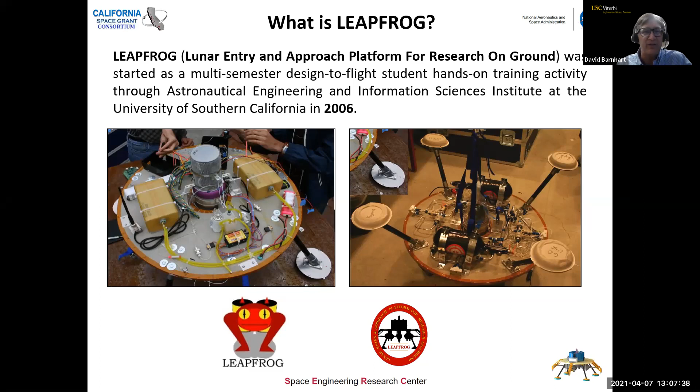Very briefly, all these charts will be up on the spreadsheet. You can look at what Leapfrog was. It was something we were lucky enough to have back in 2006 when USC put it together, meant to be similar to what the CubeSats were for Cal Poly. It was to teach students about systems engineering related to a lunar lander system, utilizing an RC jet engine to essentially take out gravity.

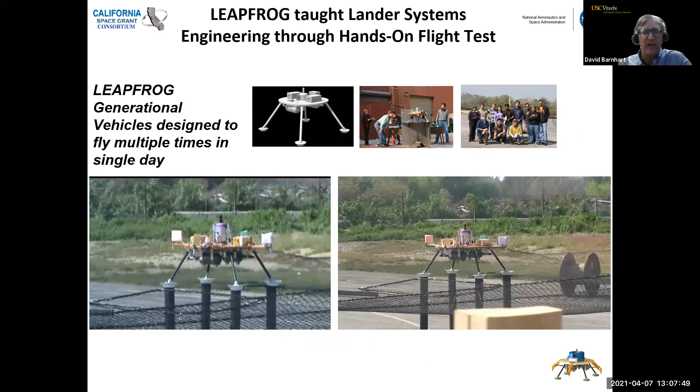We've had flights, you guys can see those on the website, I won't go through those today. We are upgrading the vehicle with a bit more safety and ease of operations capabilities.

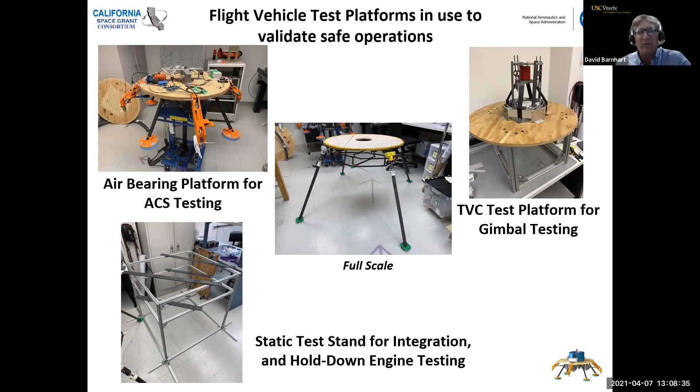Again, you will get basically what you're looking at there as a kit, without the engine. And at least that's the new activity we're doing from our project plan.

I won't go into details on this because the guys will talk about it briefly. But in essence, what we're describing today is our methodology by which we merge the hardware that will fly on the vehicle with a methodology to allow you to simulate it, and then code that would actually fly on a piece of hardware that is synonymous with both.

So that's the Pixhawk device and the PX4 controller that you actually see there, that we will actually have on the vehicles. So you're going to be running simulations that conform to that environment that eventually would port to that actual processor that would be on the vehicle.

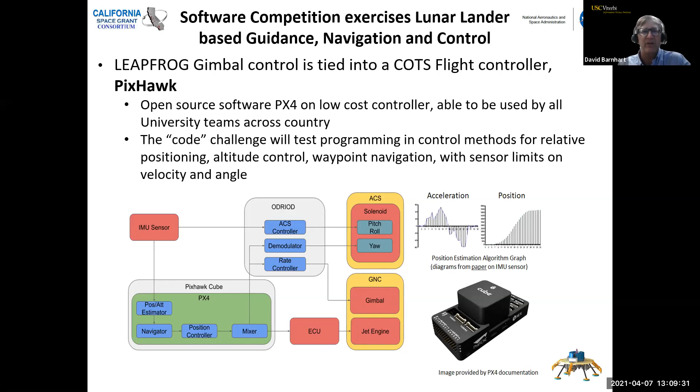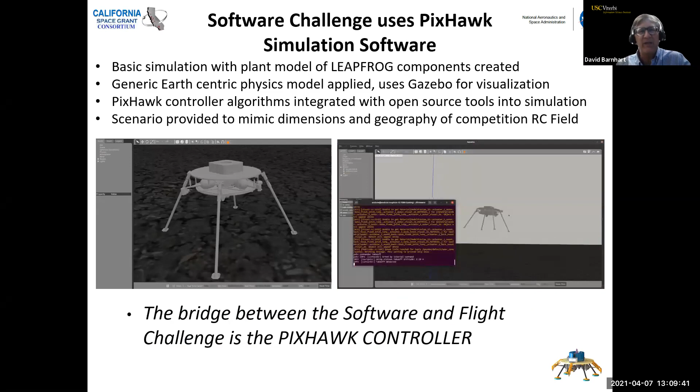So that's how we're linking what we're doing with the software and what would eventually be on the hardware that actually flies. I won't go into the details in this. You're going to see a lot more details about how the team actually came up with the simulation software and how they put it together. So I'm just teasing you here for the moment.

The particular flight challenge scenario, we will not go over today. Today again is just the tool sets that we want you to become familiar with that will be involved in the simulation challenge. The actual scenario about how it's all put together and implemented in the simulation, we will go over in seminar 2.

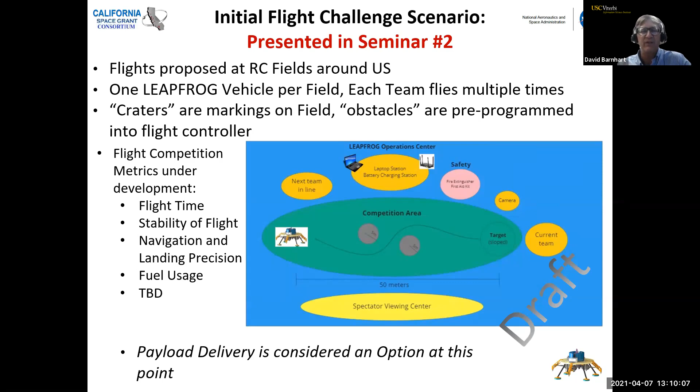So that's why we've broken these seminars up into sequences. In seminar 2 and seminar 3, we will convey the methodology by which you upload your software to our GitHub or storage location, where we then run the simulation challenge and do the scoring as we go forward. We're still working those things out, trying to get all the portals set up correctly to make sure you all can have connectivity to it, so we can have the software come together.

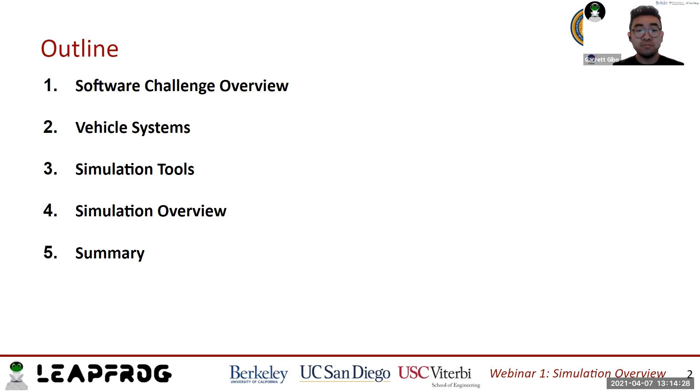So for the actual challenge of what a competition team would be trying to accomplish here, there's two main aspects. One is dynamics and controls oriented, where there are key controllers not fully implemented in the simulation, so it'd be up to the competition team to design these controllers and implement them in the correct location. The second aspect is a navigation aspect, where competition teams try to develop a navigation algorithm that optimizes time, fuel usage, and maximizes the projected score.

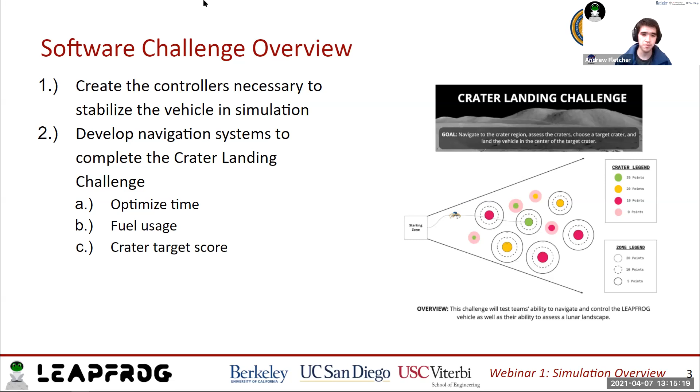This engine is on a gimbal system, controlled by two linear actuators, one for each axis, with a saturation force of 900 newtons. In addition, there are 6 cold gas thrusters on the outer edges of the vehicle. 4 of them are facing downwards, 2 on each axis - 2 correspond to roll, 2 correspond to pitch - and 2 of them are oriented sideways for yaw control.

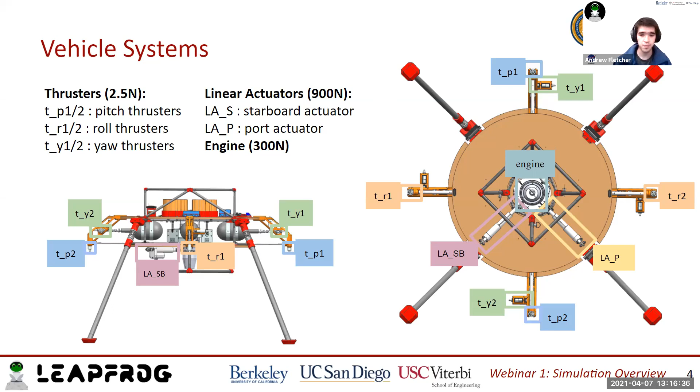For actual flight software, we're using a variation on the PX4 software. So what is PX4? It's an open source flight control software that is really popular in the drones and unmanned vehicles community. The reason for this is it's very modular and easy to expand, and that was really important for our situation because we had to extend PX4 for the Leapfrog system.

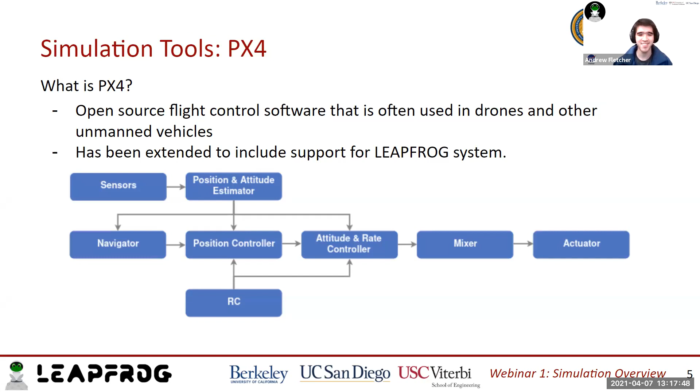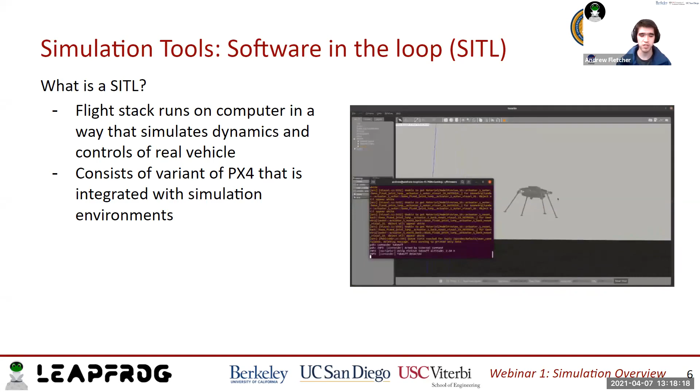In order to approach this simulation, we're using the concept of SITL, or software in the loop. This means we're running our flight control software and a simulation environment separately, in a single loop. So for our case, we're running our variant of PX4 as our flight controller, and this information is constantly fed into our simulation environment, which then gets fed back into our flight control software.

Moving on to Mavlink, this is a very PX4 software suite concept. PX4 uses Mavlink because it's a very lightweight communication protocol, which is important since most of the transmission is wireless. It's optimized for transmitting different kinds of information pertaining to the vehicle. Telemetry data is very important for vehicles, but at the same time we need to configure parameters as we set up an autonomous vehicle. It also provides large extensibility for different languages, which is important when developing plugins that aren't necessarily within the same software framework.

So as we kind of hinted, we're using different software frameworks that are perhaps optimized for a specific language.

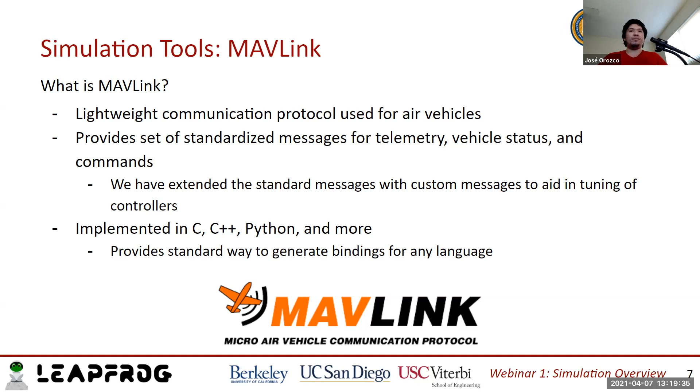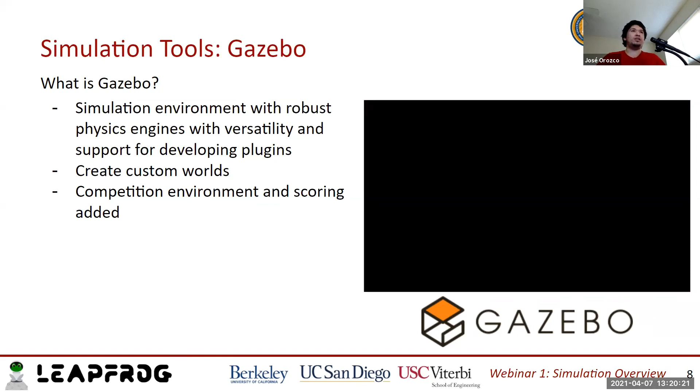Moving on to Gazebo, this is another portion of the SITL that PX4 provides. It's a physics engine that's very versatile and gives a lot of support for developing new plugins. This was important for us because we had to develop controller plugins for the extensibility we were giving to PX4, and we also had to develop scoring plugins specific to our competition. At the same time, there's a paradigm for creating new worlds, which is helpful as we need to develop different environments for our competition.

Lastly, we also have other visualization tools. QGroundControl is specific for mission planning. It allows for configuring the vehicle. As I previously mentioned, we have the Mavlink messages, and QGroundControl is basically just a way to visually represent all the information that one is receiving from the vehicle, and one can manipulate the information accordingly to what needs to be addressed.

And then we also have PlotJuggler. This is specific to the ROS environment, which we'll cover later on. But this is very important for, in our case, we tend to use it for tuning and more of the, I would say, more specific or more technical tasks that we need to do. And it's very convenient because one can visualize different types of data at once and across time.

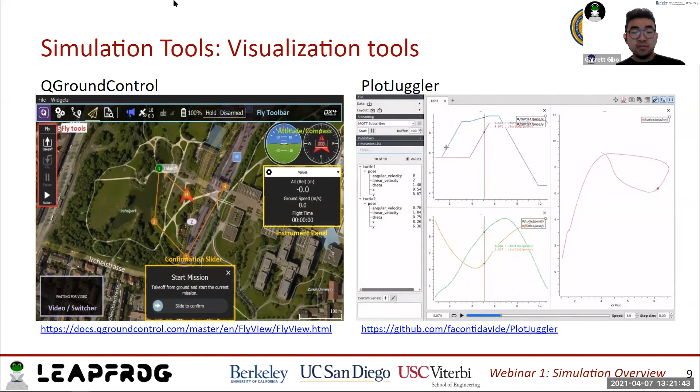So the last major tool and framework that we're going to be recommending to use is ROS, and also specifically MavROS. If any of you guys are familiar with robotics frameworks in general, ROS is probably one of the most widely used, if not the most widely used robotics system across the board. It allows you to easily create different tools, libraries, and it has a whole series of applications that are very useful when dealing with robotic systems when you have different hardware, different networks and interfaces to connect all those things.

And one of the major advantages of using ROS specifically is that it has a centralized communication system that relies on a pub-sub, publisher and subscriber system, where you can just send information between any ROS compatible node by just specifying a specific topic name and a specific message type.

This is going to be very useful for actually extending the PX4 framework and creating your own navigation algorithms, because communication between PX4 and your external navigation system is going to be as simple as just specifying a topic and telling PX4 and ROS to look at that topic.

And MavROS is the specific ROS node that you would probably be using to do that, because it is specifically a Mavlink node that's already been created and also created to work directly with PX4. So it just allows you to very easily extend and do whatever algorithms and whatever applications you want to create.

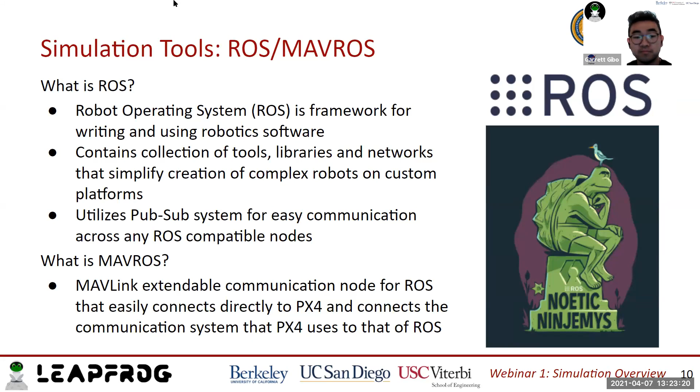We have the PX4 that's going to be running in the SITL mode, SITL configuration. We then have the simulator that connects to this, which is Gazebo in our case. We have QGroundControl, which is just really going to be used for analysis and also helping some mission control options. And then we have whatever offboard controls that teams will be using to do the actual navigation and complete the actual competition software challenge.

So the PX4 in SITL mode, what's important to know about this is how it's different from just the normal PX4. The normal PX4 is designed to run on the commercial PixHawk board, and it's specifically meant to be compiled and loaded onto that. But when you're working in just the simulation, you don't need a lot of the same hardware tests and main controllers that are all necessary for the real hardware.

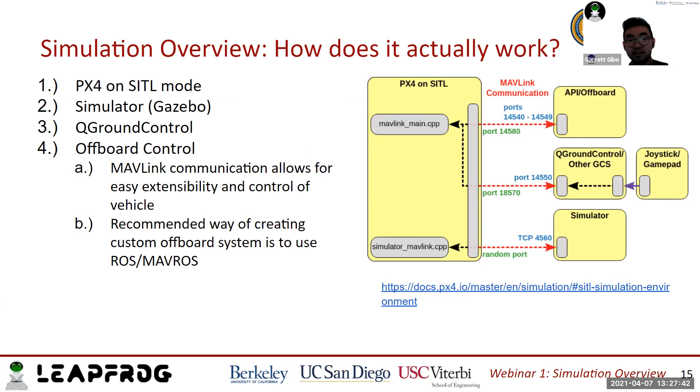And then finally, the last part that's really important is, how do you do any off-board control? How do you actually write the navigation algorithms, and where is that located? So the communication aspect between your off-board algorithms and PX4 is the Mavlink protocol.

What that means is you will be sending Mavlink messages between whatever off-board control algorithms you write and the actual PX4 environment. That's why we recommend using MavROS, because it allows you to send those a lot easier than other Mavlink libraries we've found in the past.

But by using ROS and MavROS, you should actually be able to write whatever navigation algorithms in pretty much any way that you want. They have bindings to create these algorithms in C, C++, Python. They have some MATLAB bindings as well.

So you can really just put your off-board control, your guidance and navigation algorithms anywhere, make sure it's ROS enabled, and then just send those messages directly to PX4, and it should respond and do whatever you're telling it to do.

We've had some links scattered throughout here that detail the actual PX4 documentation. So in addition to these diagrams, if you want lower level information about everything there, you can always check out the docs that they have.

So that's all the main components and all the parts that we wanted to break down. In summary, what we've really talked about is what the actual Leapfrog vehicle is, what the systems are that control it, and how those actually work. We went over all the individual tools.

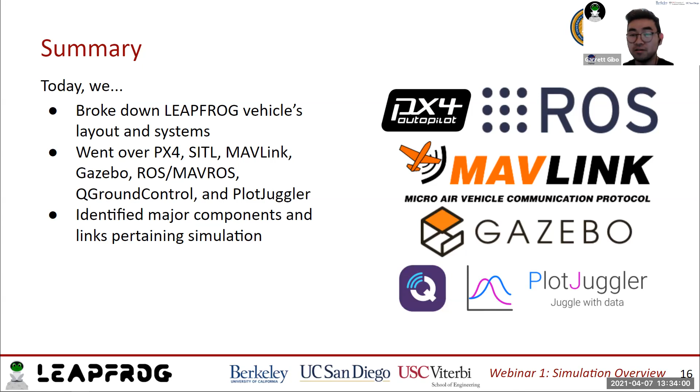In the other more detailed document, we do have more links for that. In webinar two, that's when we are planning on actually breaking down exactly how to install, download, and set up everything. We'll be going through exactly where everything is and literally walking through how to set up everything together.

Okay, well, the first thing though is if you go back to any one of your charts that had a link to it. Yeah, like right here. So this.

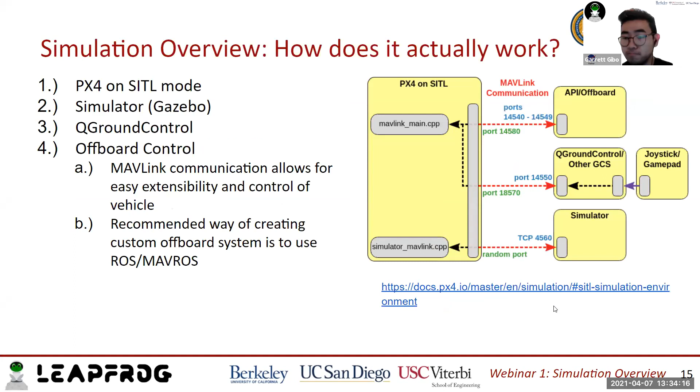This link should just link back to - I don't know if you guys can see this now - this is just the PX4 document, or the PX4 user guide.

But the PX4 simulation itself, there's software there that I think was the first question we need to start with - where do they get the software and how do they load it onto their machines? So the PX4 software we're using is the one we have currently configured to be automatically sent to people on GitHub when they sign up.

Because PX4 is open source and they do have the official GitHub repo that anyone can look at, but that doesn't have our configurations and modifications for it. Our configurations are on the actual Leapfrog GitHub organization.

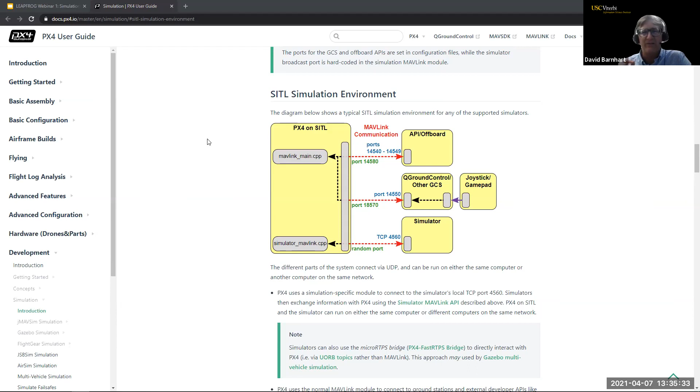But if they - I mean, this presentation was meant to convey these are the tools that were used, and ostensibly they can then go in and get familiar with the tool sets. The particular instantiation of the simulation we want to run, that's where we'll get them a connection to the GitHub.

Our actual version of PX4 is a private repo, but we could make a version of this public so you guys will actually be able to see exactly what you would be working with and have access to. We'll make sure to do that and also put the correct link in when we release the actual PowerPoint presentation.

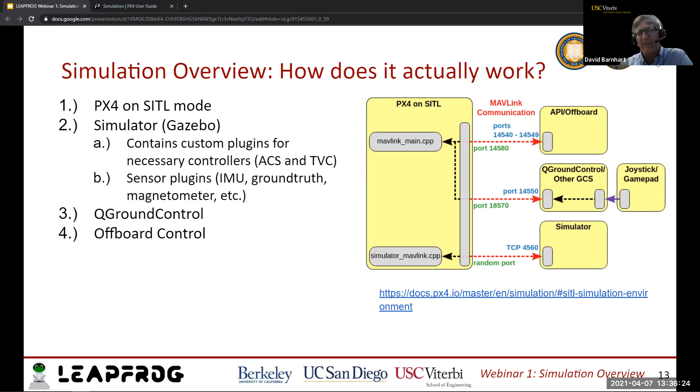Got it. I think we have a question from Sarah. I was looking at the email that was sent out, but I don't see a link to GitHub. So I was just going to ask about that.

It wasn't put in because we were still setting it up. Oh, okay, no worries, you didn't miss it. Okay, sounds good, that's on our action. We're moving pretty quick, so we wanted to get first, we wanted to get this out, we wanted to get the information out, we wanted to communicate to everybody who was interested. And we're still sort of building the connectivity that you guys can have. So that's coming out. No problem, thank you, I was just trying to make sure that I didn't miss it. Thank you, no worries, no worries.

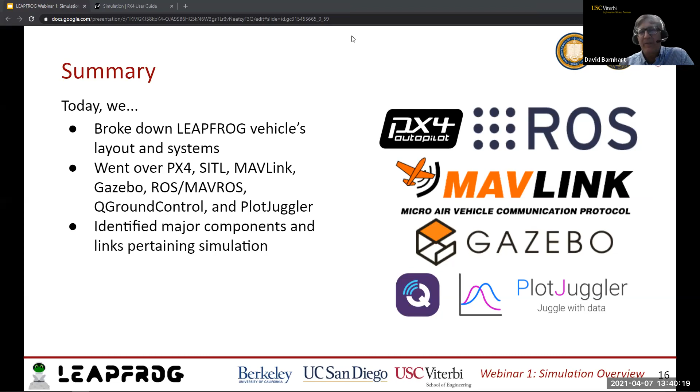We will. My guess is that there'll be a lot more questions after folks are able to sort of digest what's out there, and or we actually get all the documentation out so they can start looking at it. So again, don't hesitate to send an email or to reach out so that we can try to answer the questions. Don't want to cut folks off early, but if there's no additional questions, we definitely respect everybody's time.

So we will probably end early. And again, no later than Monday, a lot of this information will be on the website, so you can go back and revisit it. Hopefully by Friday, we'll be able to get a lot more information up on the website and the weekend as well.